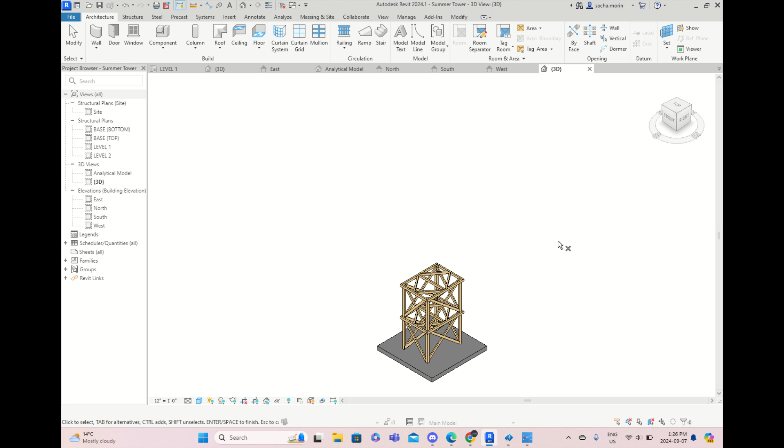This will be the first of 5 videos that will teach us how to use Revit. Granted, I will not teach you how to use the entire software—that would take me months. We're only going to look at using Revit on the seismic design team from the absolute start. So, to give you guys a little context about why we use Revit and how we use it, it's basically our way of visualizing the tower, seeing how all the pieces of wood are going to fit together without actually having to build anything.

So on my screen right now, you guys can see a small tower that by the end of the 5 videos, you guys will be able to build. It basically represents the essence of why we use Revit. It's just a way to visualize how we're going to build the tower so we can communicate that information with the other people on the construction team.

But as well as that, Revit allows us to export 2D views of this tower so that we can use it for laser cutting, jig making, or anything really that we would want to, because it does export out into an AutoCAD file, DWG, if you are at all familiar with it.

So to start from the beginning, I will teach you how to first download Revit. As you can tell on my computer, I already have it. This is the 2024 version, as you can see at the top, although I understand those of you seeing this video will have later versions, but that shouldn't really matter too much, unless you are on Mac.

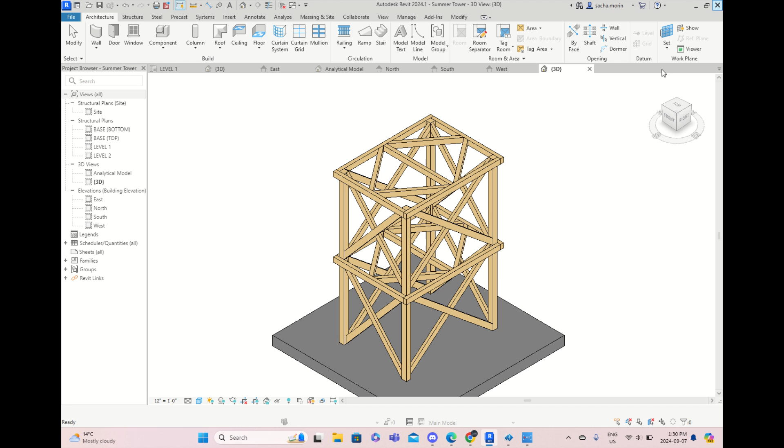So I'll remove this summer tower out of the way. No, I don't want to save my changes. And I'll open the template and go through it fairly quickly to see what you guys would see.

This is the Revit template, what it should look like when you download it on your desktop. Let's open it. As you can tell, I double left-clicked and it'll open Revit. My computer's a little slow, but that's okay. This is Revit 2024. If you have a future version, that's okay, it shouldn't change too much, and I'll still try my best to teach you how to use it.

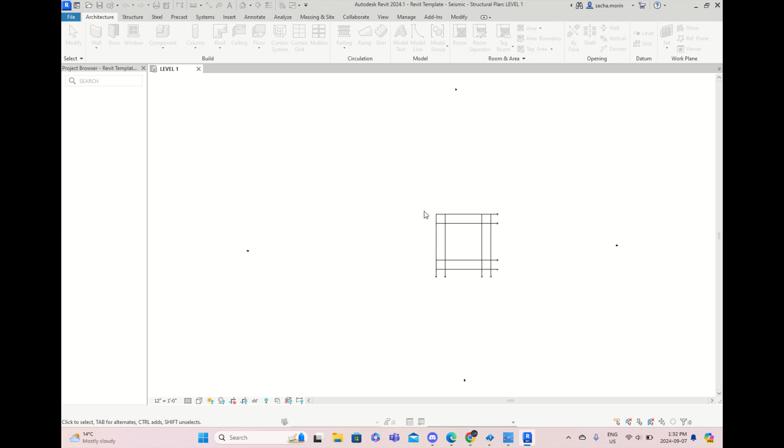For those who don't recognize my voice, my name is Sacha. It's my second year as the team's co-captain, and I focus a lot on the construction side of the team. I learned Revit from scratch. We had some past videos out there, but they weren't the best, so I'm making new ones now. In terms of qualifications, I've learned how to use Revit myself, taught it to other people, and only now am I making these videos. Hopefully that gives me a bit more credibility when I say you should listen to these videos in their entirety and try to understand as you do. Everything I say will be important. Sometimes I can get long-winded, but it's usually for a purpose.

Whenever you open the Revit template, this is what you will see. What has been provided to you can be seen on the left-hand side of your screen. To start, we'll look at the 3D view. Since we haven't built or modeled anything, the only thing on our screen is the base plate. It should already be the correct size for competition towers, meaning 18 inches by 18 inches. That's all you will see. Otherwise, all of these plan views have already been defined for you, and these 4 elevation views have already been defined for you.

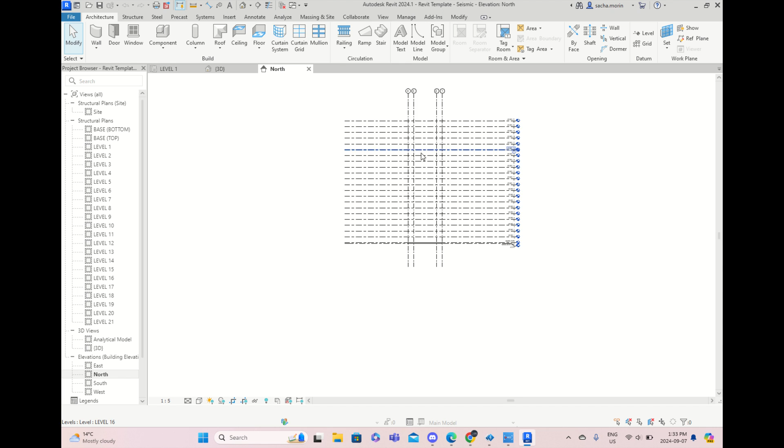Everything on the left-hand side of your screen is just looking at different views of the tower. So if I choose, say, my north elevation, you'll see that I'm looking at my tower from the north side. Evidently I don't have a tower, so I don't have anything to look at other than my base plate.

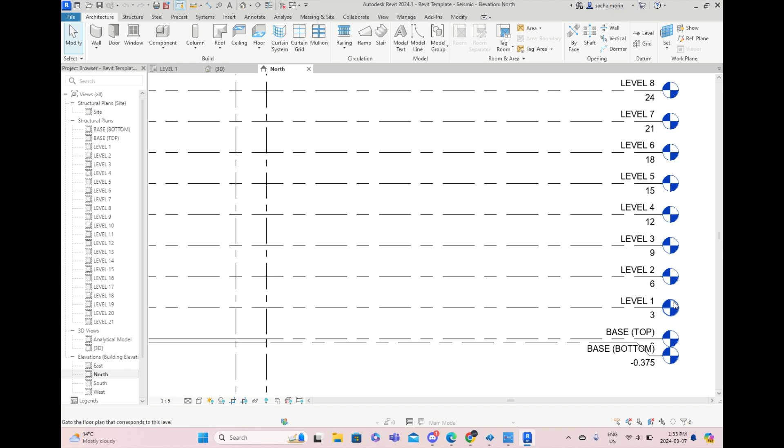But you can see the plan views here. You have one for the bottom of your base plate, one for the top of your base plate, and one at every 3 inches from the top of the base plate after that, because that's how floors are defined in the competition. It goes all the way up to 21 floors. Don't be afraid, you can make more if you like, but the tallest we've seen up to now has been 21 floors, or 63 inches.

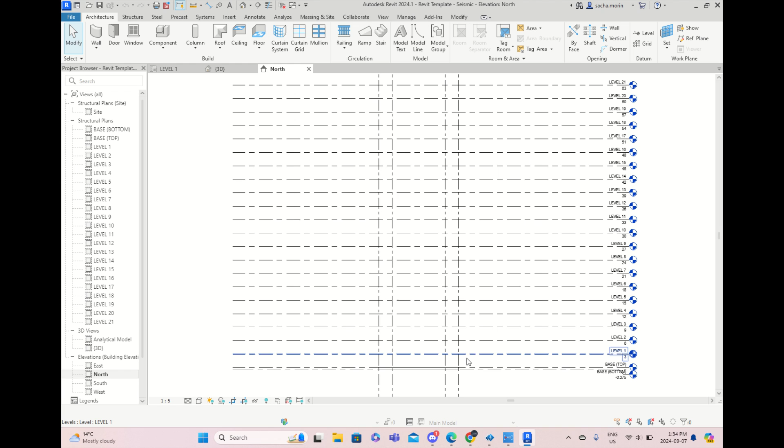So speaking of all these plan views, let's go look at one. Base bottom, again, is the bottom of your base plate. You'll probably never use this, nor the top of your base plate, unless we're making columns, I suppose. But the most important ones are going to be all these levels.

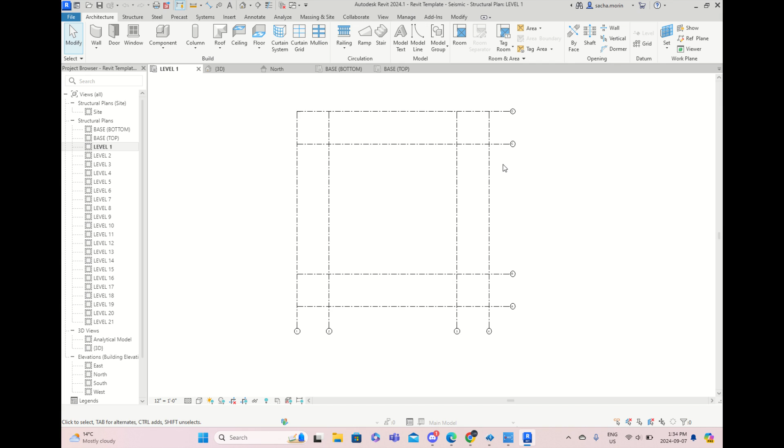Let's start with one of those. What do you see when you open up level 1, that plan view? For those of you less familiar with construction drawings, though you might have seen some of this in second year graphics class, you'll see all of these grid lines. Generally, to keep them separated, they have 2 different nomenclatures. The way it's been done here is you have 1, 2, 3, 4 on the bottom, and A, B, C, D on top, just to have that separation. As you create your own grid lines, you'll start to notice you'll call them specific things so it can help you model quicker.

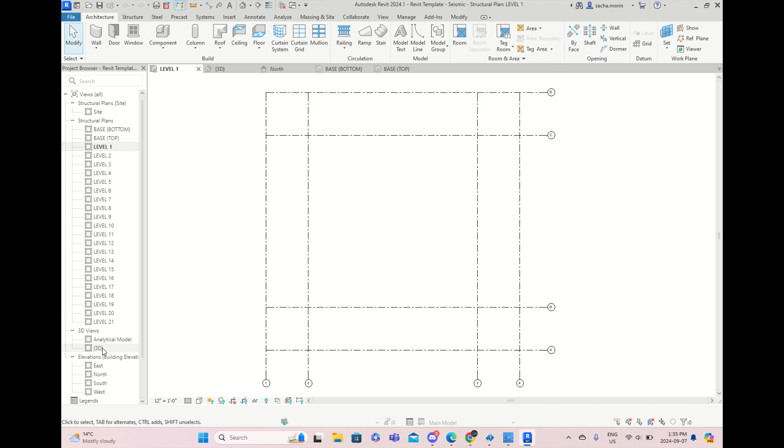But we'll get into that in a separate video. For now, all you need to know is you have all these grid lines, all of these plan views, these 4 elevation views, and you can check out your 3D model. I know there are a lot of tools and things we can do in Revit. It might look a little cluttered right now, and to be honest, it still looks cluttered to me, but that's the important stuff for now.

So thank you for watching this first video. Hopefully you have successfully downloaded Revit, understand why we use it, and have been familiarized with at least the way it looks. In our next videos, I'll teach you guys columns, beams, braces, sharing files, linking files, everything like that. So hopefully you stick around.